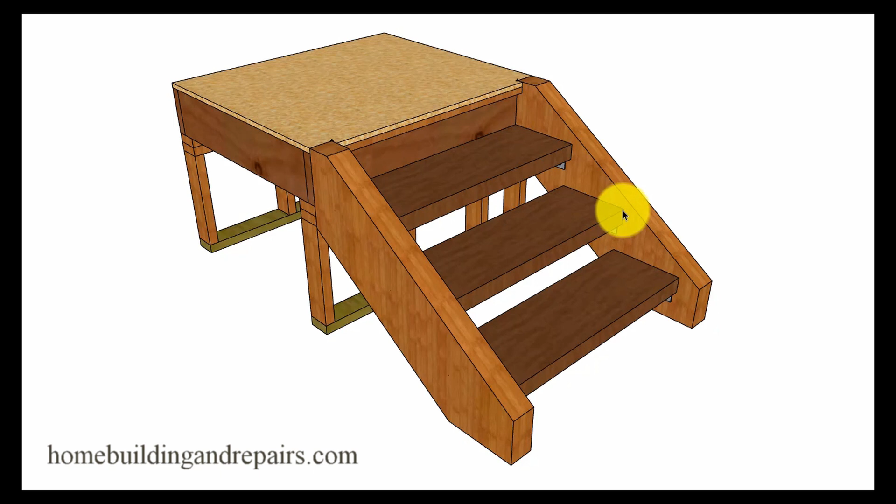And that's usually going to look something like this, to where the front of the tread is back just a little bit from the top of the stringer instead of sticking out, obviously. And of course, this one here looks better. And this is the only way I've ever done it.

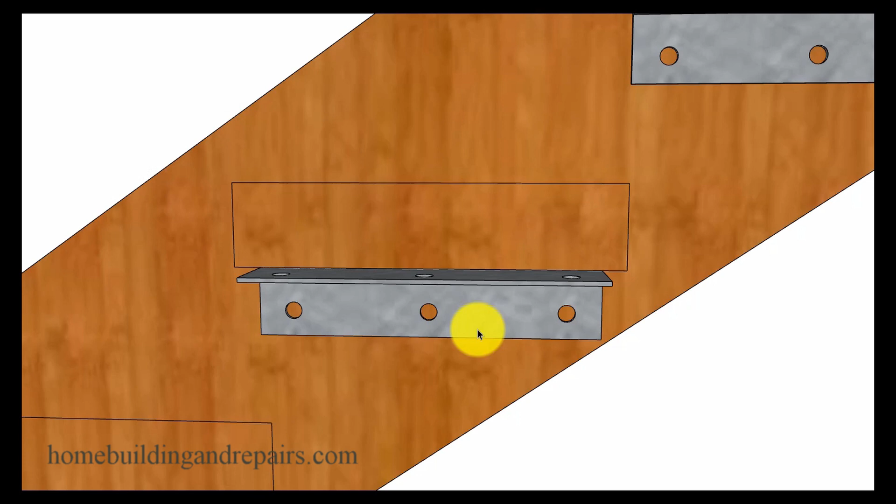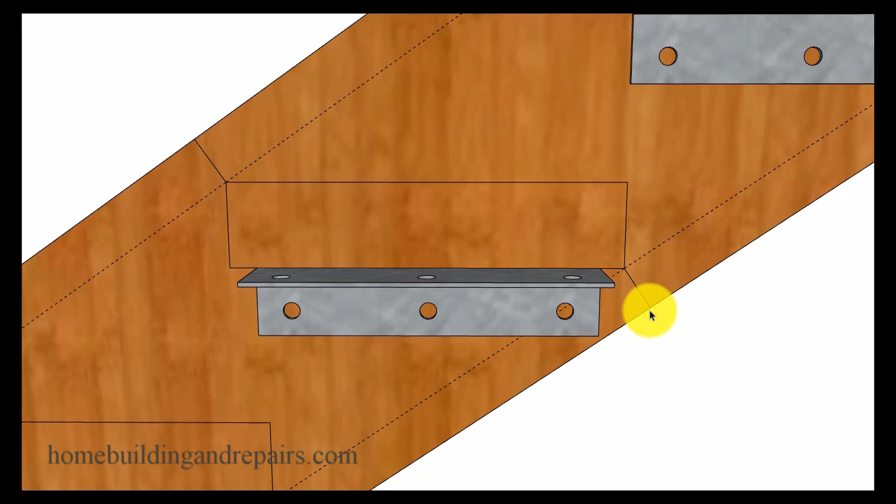Now, in order to center the tread and the bracket, or position the bracket where it needs to be, all you need to do is measure from the top of the stair stringer to the top front corner of the stair tread, and then do the same at the bottom corner and the bottom of the stringer. Or you can simply draw a couple of lines like this that would represent the front and the back, and then center the tread accordingly.

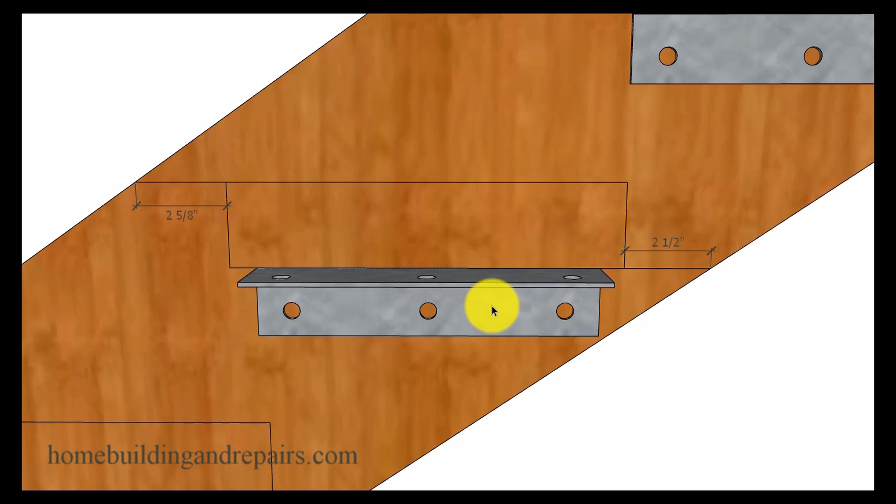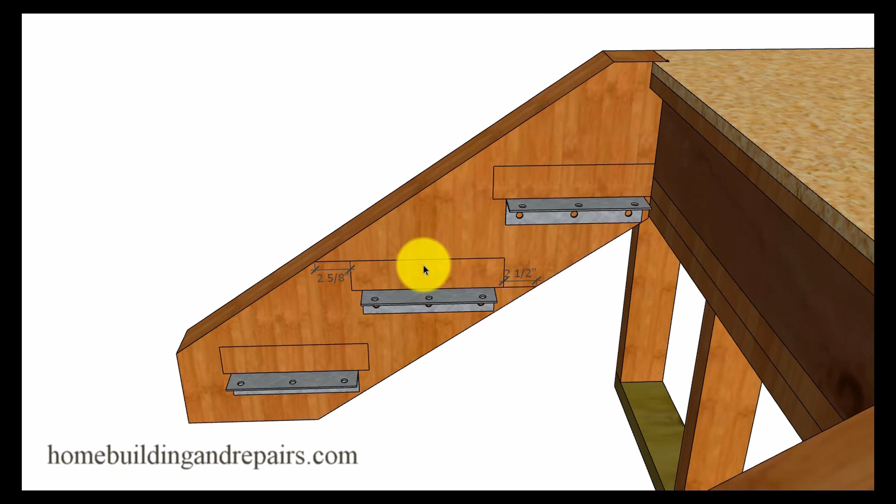And it's not going to be that big of a deal if you want to move the tread a little bit further forward or a little bit further backwards, just as long as the bracket is going to be able to connect to your wood stringer. And you could see where if you move this back far enough, this bottom bolt isn't going to do you much good. So there you have it, the most common method for building stairs like this, and the one I've used for a long time.

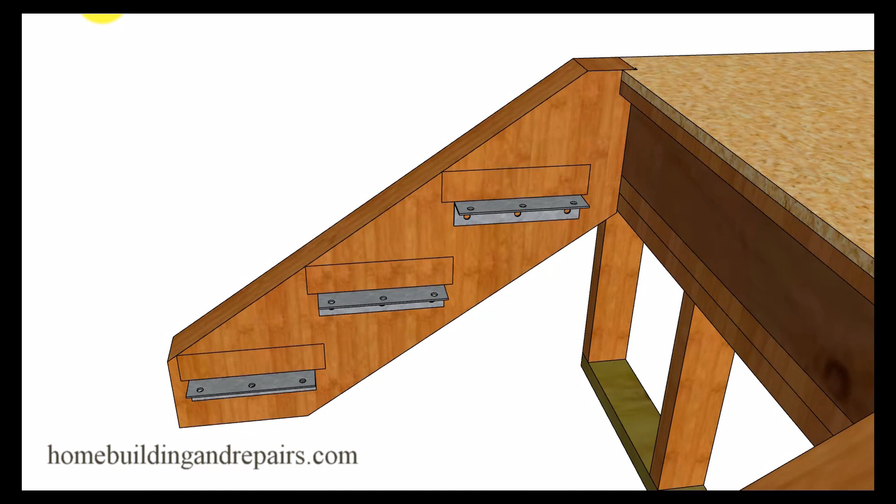However, it's not going to be a big deal, like I said, if you move everything forward because you like the design, or maybe you're looking for a little more structural strength, or maybe you're even using a smaller stringer. And don't forget that if you do something like this, that you might need to make changes to the bottom or the top of the stringer.

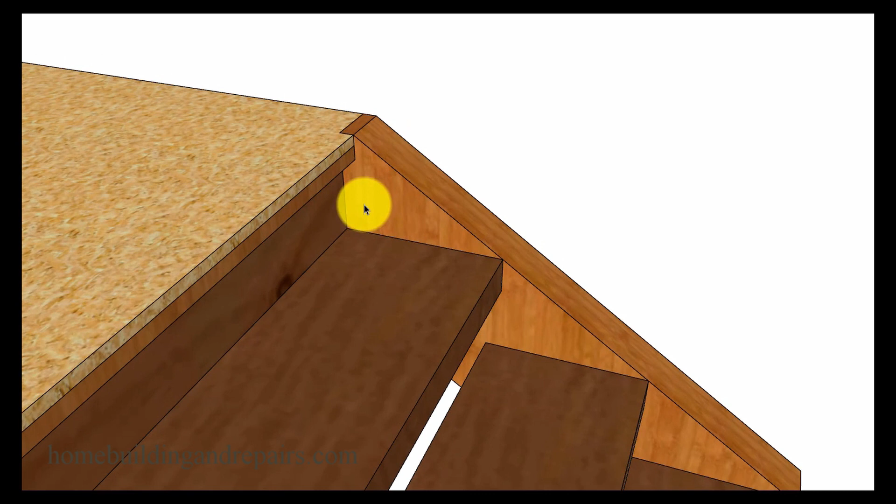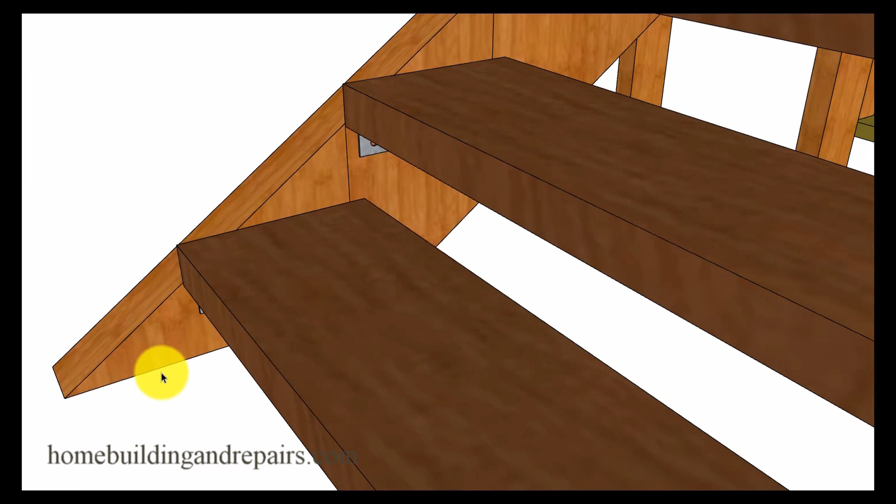And all we would have needed to do to have something like that happen would have been to remove a little bit more off of the top of the stringer. So again, the other parts of the stairway might need to be modified. Just make sure that when you are modifying these parts, that you don't create a trip hazard like this one. And trust me, I've seen these at the bottom and I've seen them at the top.

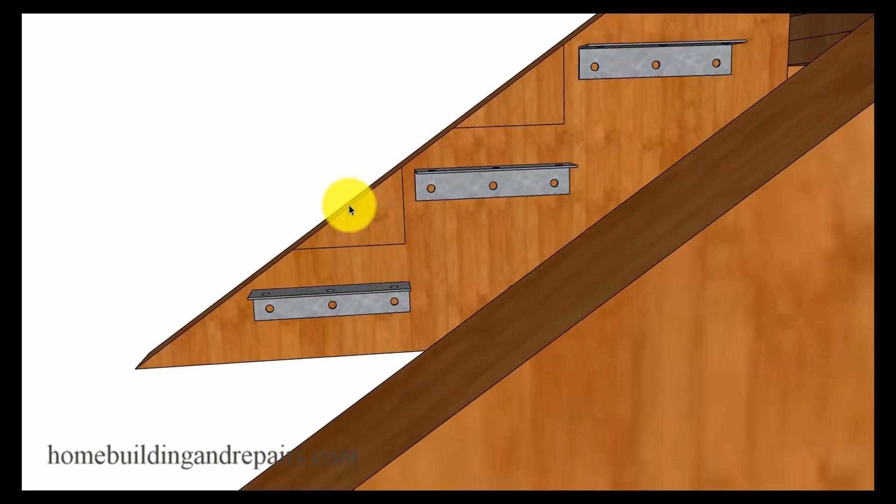Next up, let's try and figure out what they did in the first place to get the tread sticking out past the top of the stringer. And the only way I can figure it out is that they must have laid it out a little different, to where the line they were using for their tread or their riser might have represented the front of the tread, and of course that would be the vertical line, and the horizontal line might have represented the top of the tread. And then they would have just simply measured down to get the distance for the metal brackets or lumber that would have been used to support the treads.

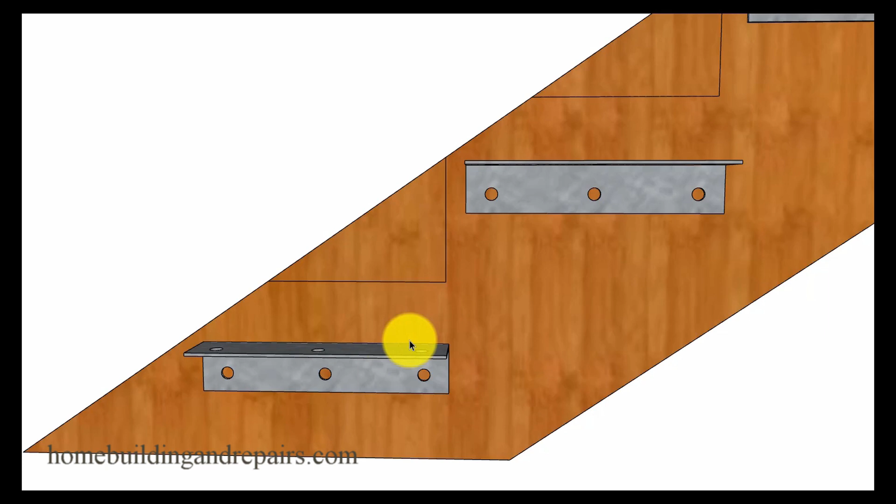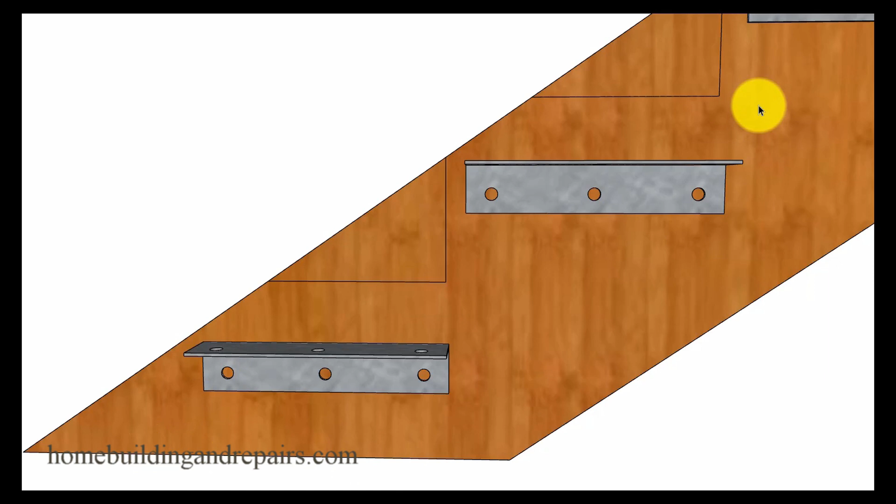Another method that I have seen for this would be on a replacement stringer, to where they take the existing stringer and they just simply create another stringer by tracing over a new piece of lumber and then placing the stringer in place. And then starting with a level line, measuring up the height of the riser, leveling across, and then using these lines to represent the top or the bottom of the stair tread.

And I'm not going to go into a lot of detail on all of that because I don't like those methods, because they often produce stairways like these that I also don't like. So again, personal preference, don't let me get carried away here, and you can do whatever you want to do.